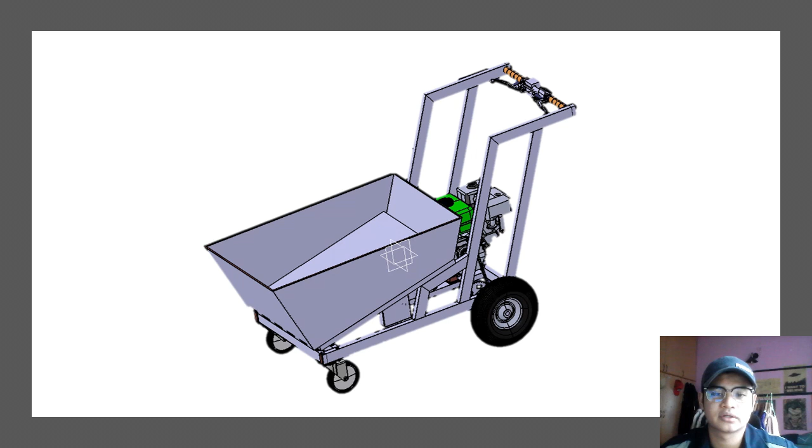As designers, they have to provide drawing and drafting of the product, suggest suitable design ideas, and guide members on Catia drawing, such as helping members if they need help drawing in Catia.

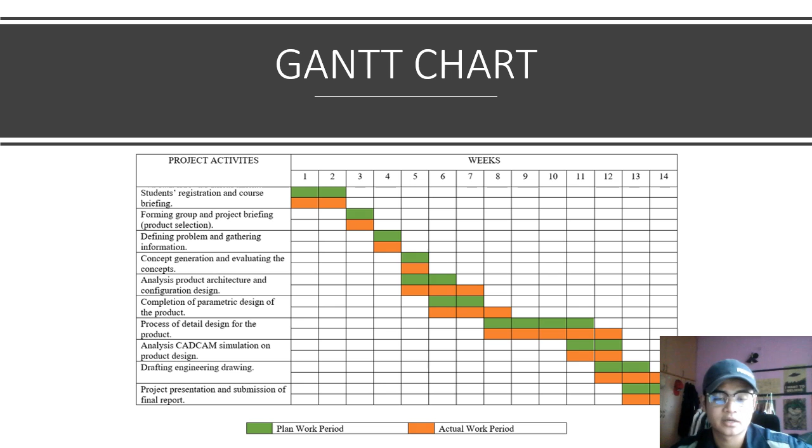Next, on customer needs, we sent out questionnaires to several agriculture workers and agriculture students, conducted through the Google Forms platform. Here are some of our questions on Google Forms, where we ask basic questions about how they use the wheelbarrow.

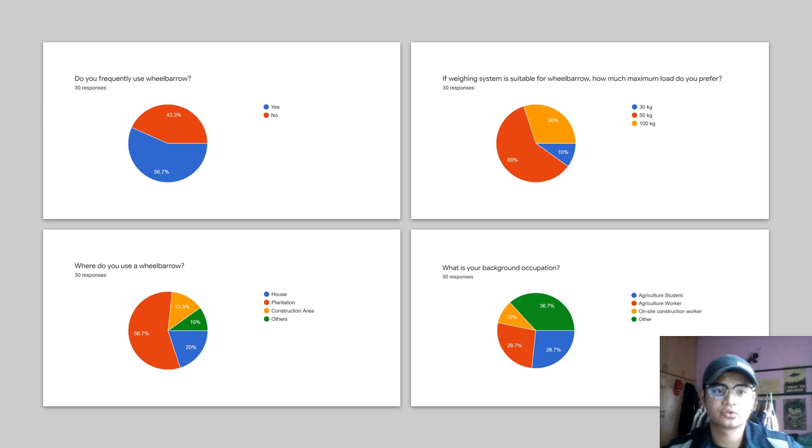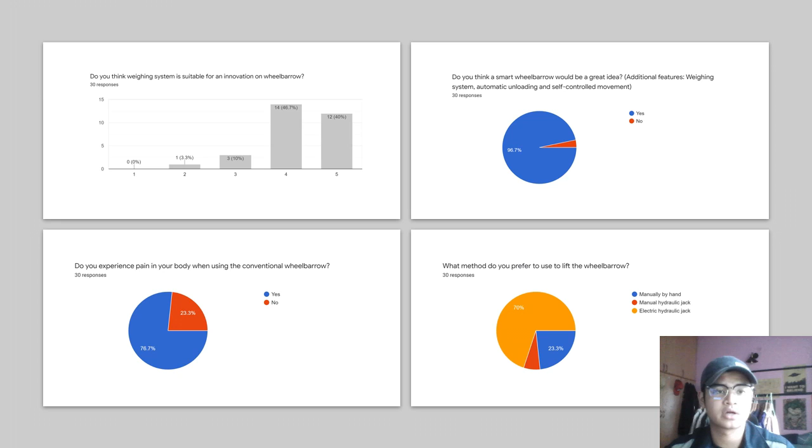From these questions, we used their feedback to come to a conclusion on what would be the best innovation we could use on our wheelbarrow product. Assalamualaikum.

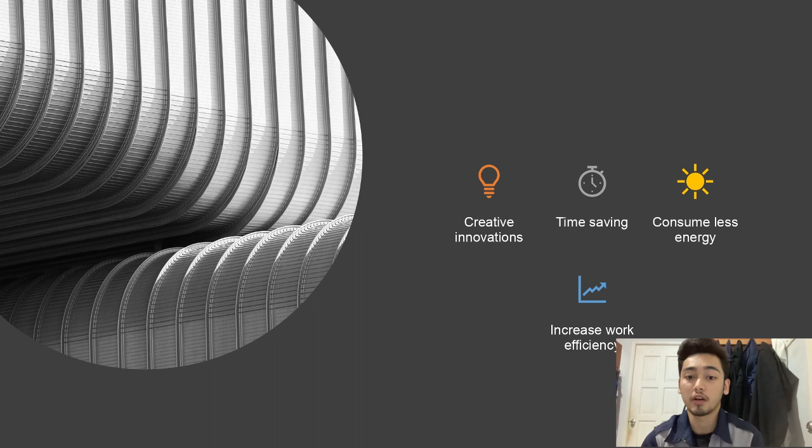For the first one, creative innovation, we installed an electric jack that makes it easier to unload the bucket storage, and we also installed a weighing system that shows the current load weight.

The second benefit is that our product is time saving because it is powered by an engine, which makes it move faster and easier to move around, along with the electric jack as mentioned before.

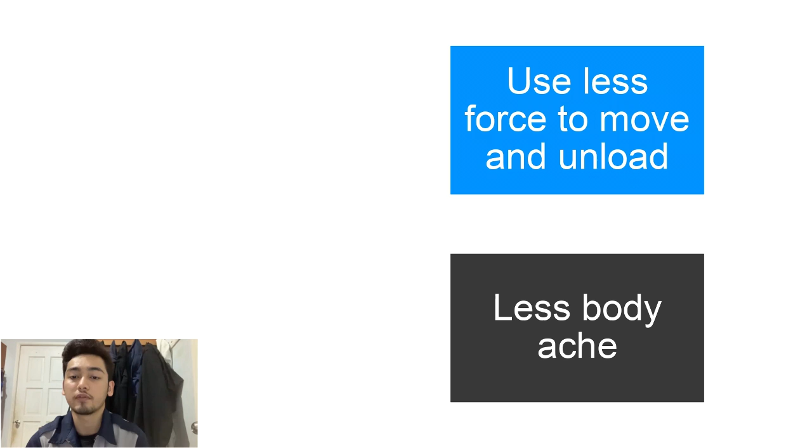The third one is it consumes less energy because with the help of the engine and electric jack, it will use less force to move around and unload, and it will also prevent body ache.

The last one is increased work efficiency. Our wheelbarrow can carry more load due to bigger bucket size, and more work could be done at once.

We continue with the problem statement. Number 1, standard wheelbarrow has an unstable design. Number 2, users are not able to use it as their preference. Number 3, a standard wheelbarrow can cause back injury. Number 4, standard wheelbarrow is hard to move around. And the last one, standard wheelbarrow is hard to unload.

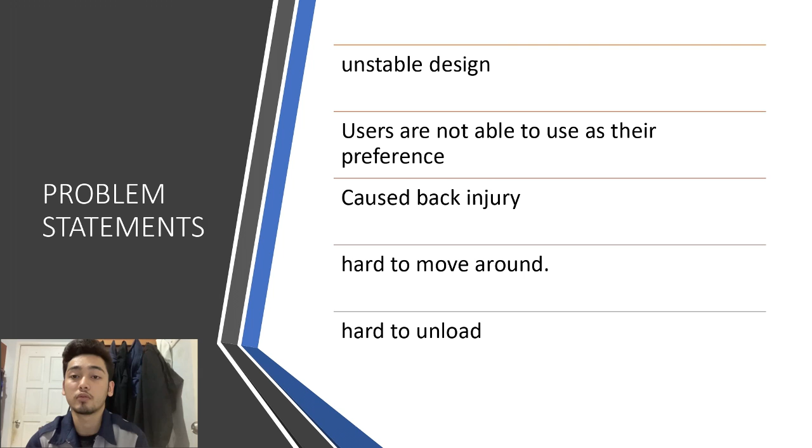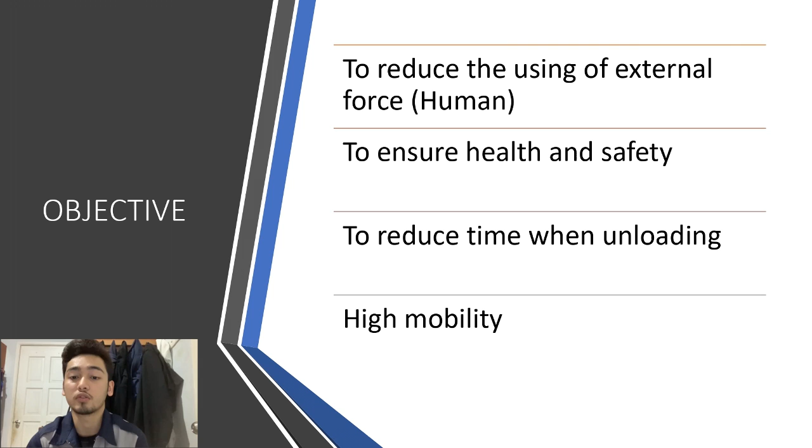Next, we move to the concept development. Referring to the Pugh chart for the battery, we will use the second one, PNS 12V 7.2Ah rechargeable lead acid battery, because it has the highest total score among these 3 options.

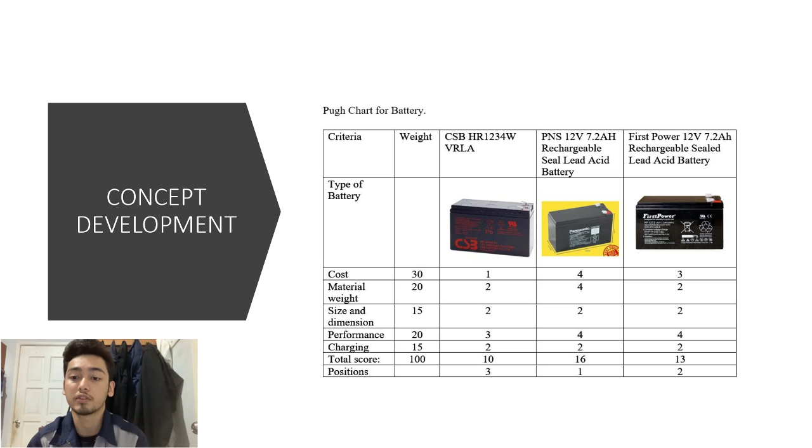Then we move to the Pugh chart for the electric jack, and we will use the third one, durable electric car jack, because it has the highest score among those 3 options.

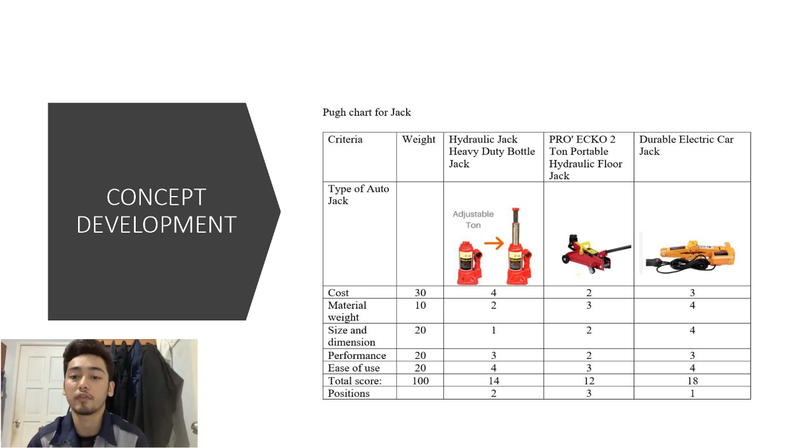Next is the circuit layout for the weighing system and the installation of the Arduino in the circuit. The circuit shown here is the whole circuit that will be represented in our product.

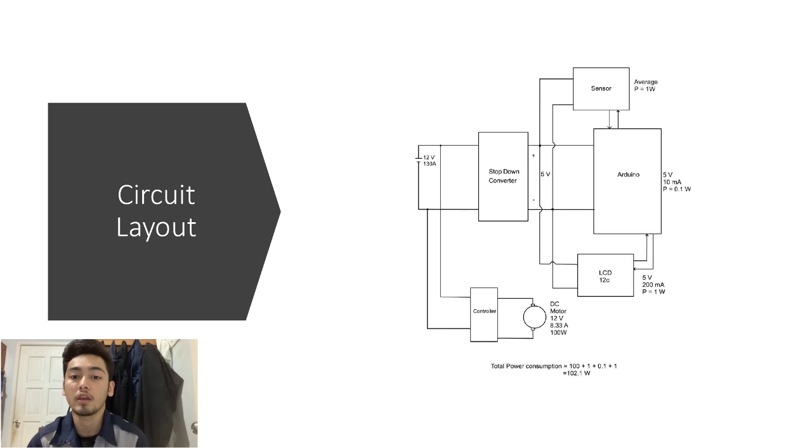And the last one is the working principle of the electric jack. First, turn on the switch for the electric jack to run the jack. Second, press and hold the up button to lift the bucket upward in order to unload the load. Third, press and hold the down button to make the bucket return to its original position. And the last one, turn off the switch button to power down the electric jack.

That's all from me. Thank you.

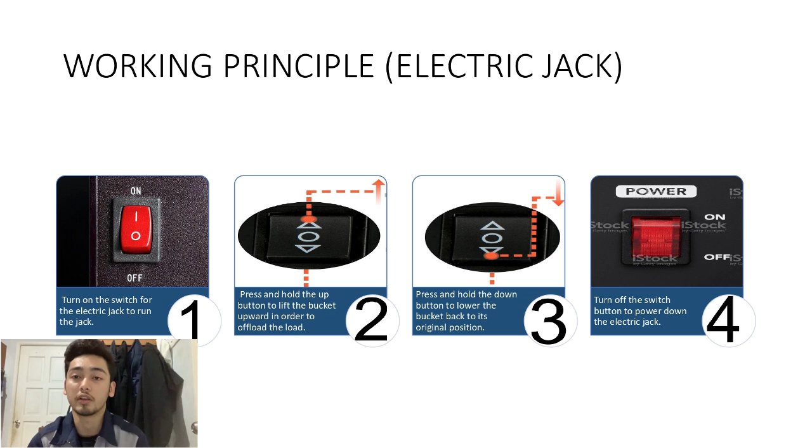This is our design for the wheelbarrow this year. First, the motorized jack, with 430mm of width and 137mm of height, and the weight is 4.5 kg.

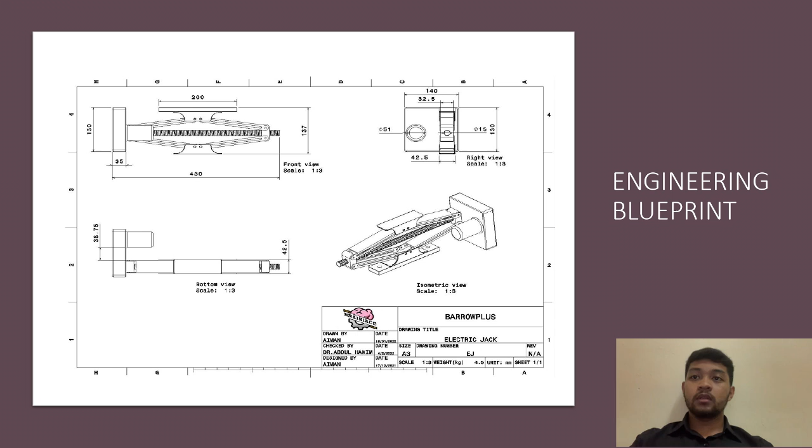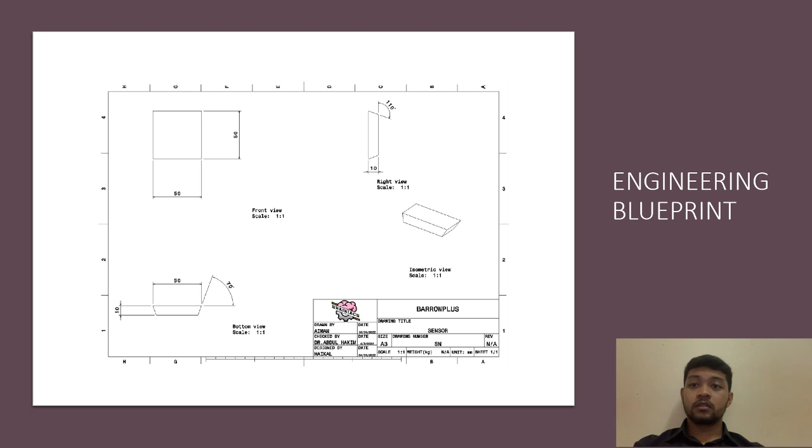Next, I will present the material used and joining method. For the motorized jack, the material used is described as heavy-duty steel. The American Iron and Steel Institute developed a classification system for the different types of iron and steel.

For the joining method, the four metal pieces are all connected at the corner with a bolt that allows the corner to swivel. The screw thread runs across these assemblies and through the corners. To reduce the weight of the jack by changing the manufacturability, we have to remove the welding to avoid distortion.

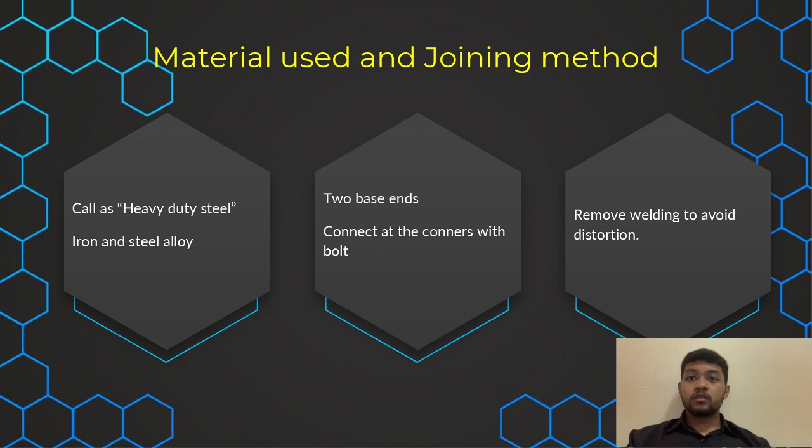Next is the drive system and the product performance. Under favorable conditions, the jack can lift the wheelbarrow when it comes in contact with the upper plate, caused by rotation of the power screw through electric power taken from the 12 volt battery. The switch button connected with the jack will be plugged into the port, thus connecting directly with the battery.

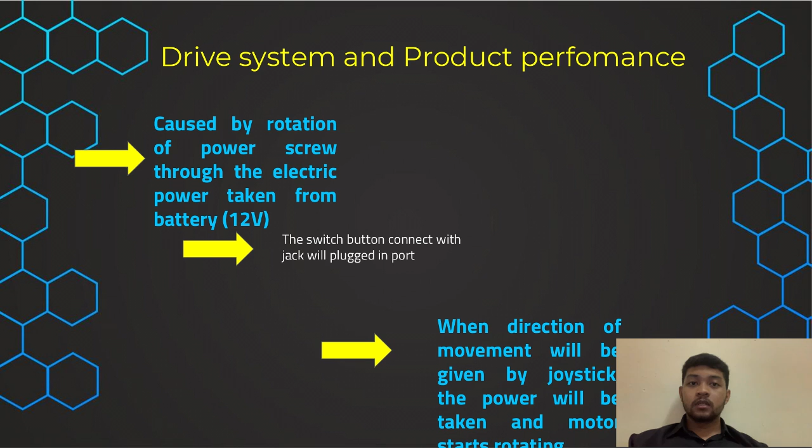When the direction of movement is given by the joystick, power will be taken and the motor starts rotating. The motor will transfer its rotating speed to the pinion gear, meshing with a bigger gear which is connected to the power screw, and it will rotate.

Next, for the safety features: it is stable and easily controllable by a switch. Second, it is capable of lifting a wheelbarrow load of 50 kg to 100 kg. And the last one, the battery case is used to protect it from bad weather.

And that's all from me. Thank you.

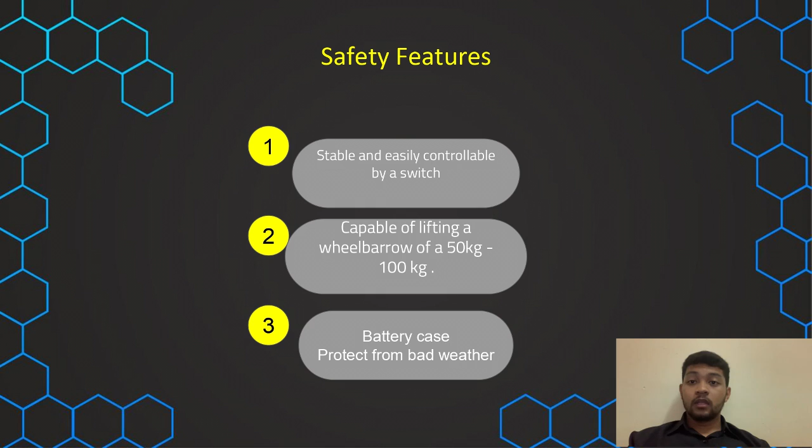In our engineering analysis, first we want to address how we use finite element analysis on the jack and the base of the system. We use 500 Newton in all of our analysis, and all the studies are static analysis. In this slide we're going to use two analyses: the first is von Mises stress, and the second is displacement of the product.

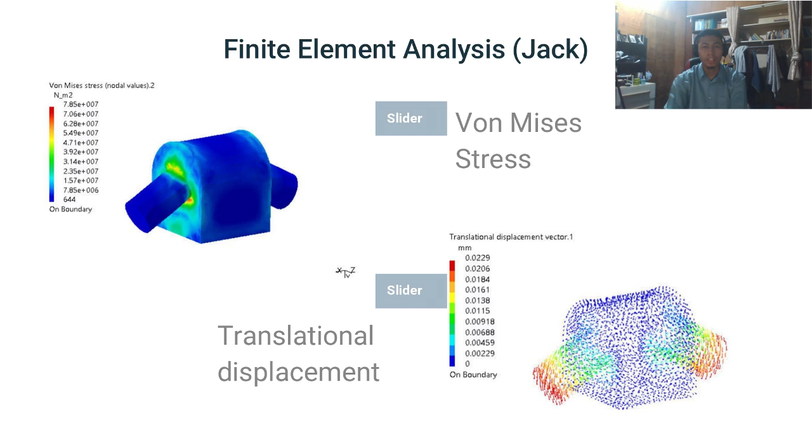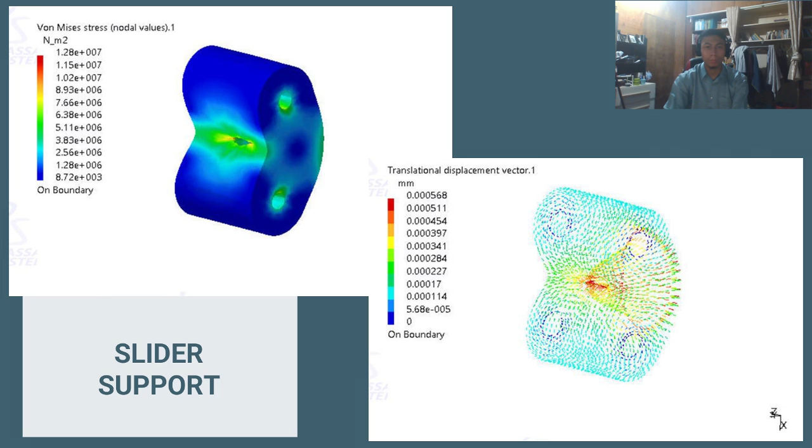For the first component of the jack, we use the slider. We clamp or fix the slider at the bottom, and for the distribution force, we apply it at the top of the curved surface and both cylinders on each side.

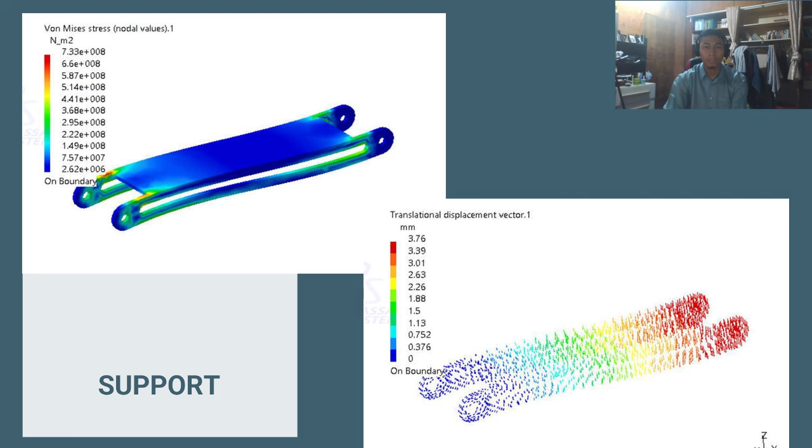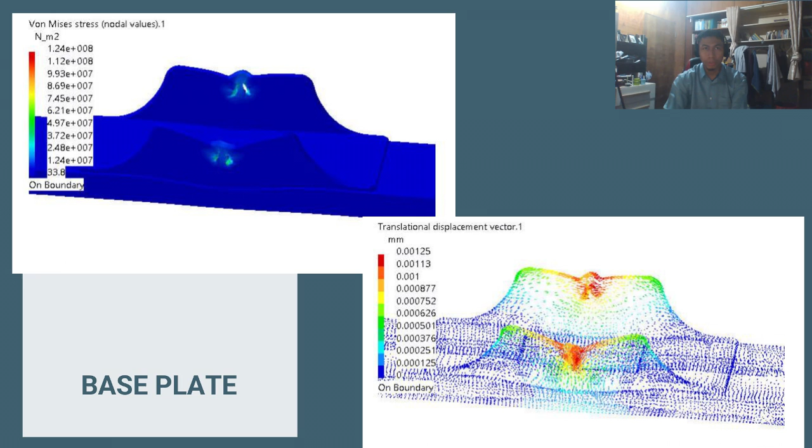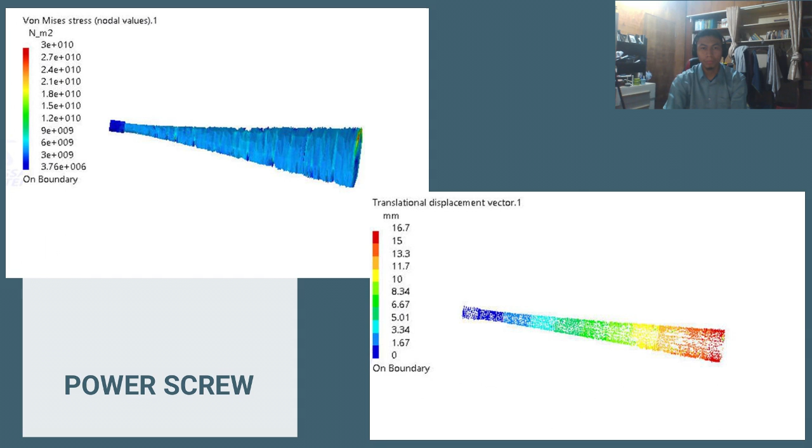From the diagram, we can see the max stress happens at 7.85 times 10 to the power of 7. The part will not fail, since the max stress of the steel is 8.9 times 10 to the power of 8. From the displacement diagram, you can see most of the displacement happens on the side of the cylinder.

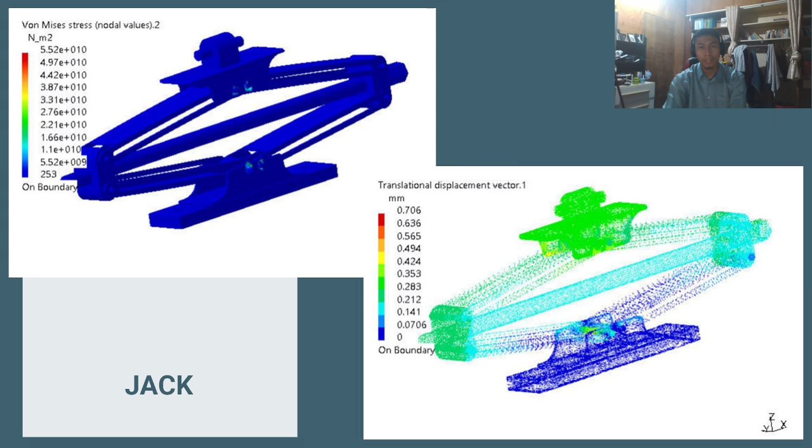For the combined product, most constraints use contact connection properties between all the touching parts. We clamp the product at the bottom, and the force acting on the part is the same as used in the slider. But from the stress diagram, you can see the stress acting on the product exceeds the steel yield strength, so we conclude that the product will fail.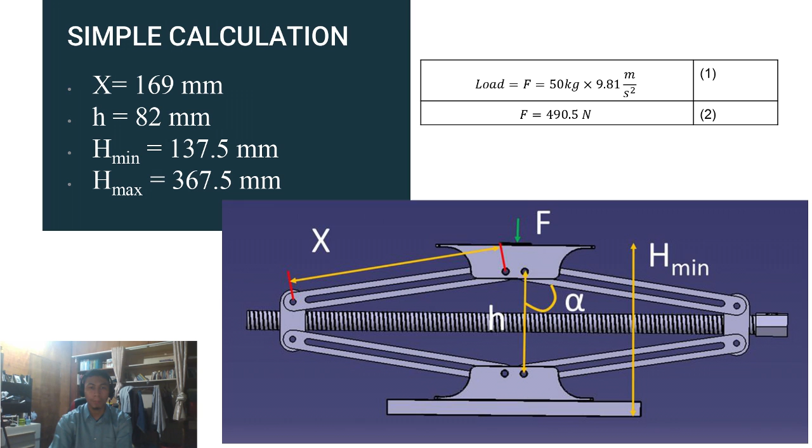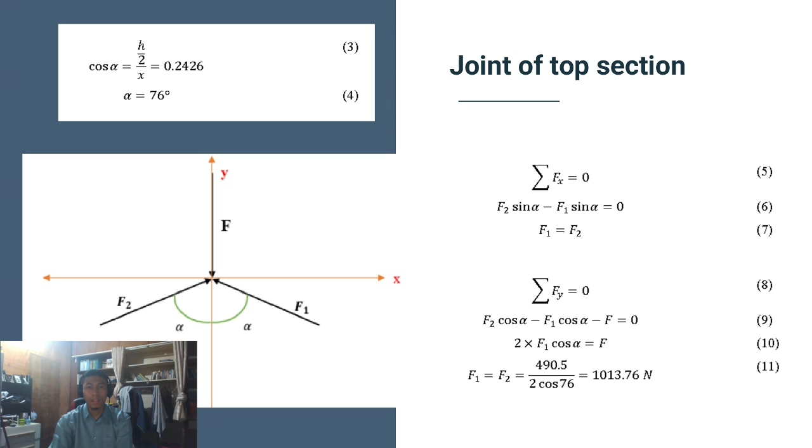For our simple calculation for the scissor jack, from the force analysis diagram, we assume the scissor car jack is loaded vertically symmetrical. In the next slide, we simplify the mechanism at the joint of the top section as shown in the diagram. The following calculation determines the forces at the joint of the power screw and arms using equilibrium of forces.

To finalize and justify our design, for example regarding our potential customer needs, the feature design should be able to assist customers in operating the wheelbarrow. This is shown by our initial research on customer needs when investigating the design solution for the problem. The questionnaire showed that more than half of our respondents frequently use the wheelbarrow.

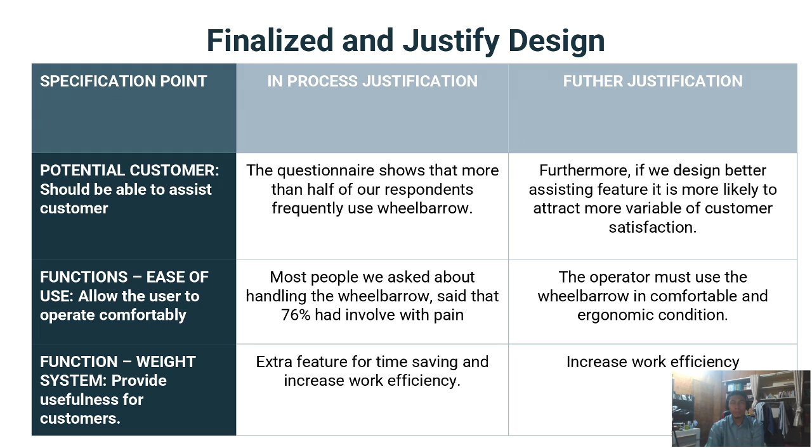Besides, if we design a better assistive feature in our product that appeals to a wide range of customers, it is more likely to attract a more variable range of customer satisfaction.

In our actual result, the jack we will use is able to lift a maximum of 2 tons, and our product only requires lifting 50 kilograms. So the FEA we conducted is only for experimental purposes or as a reference.

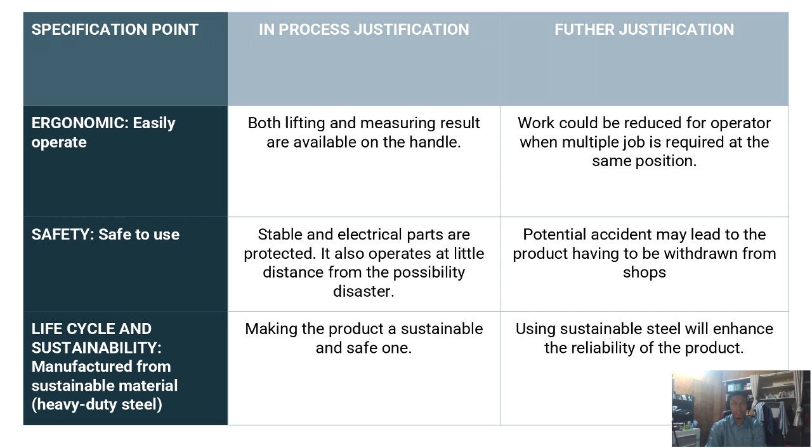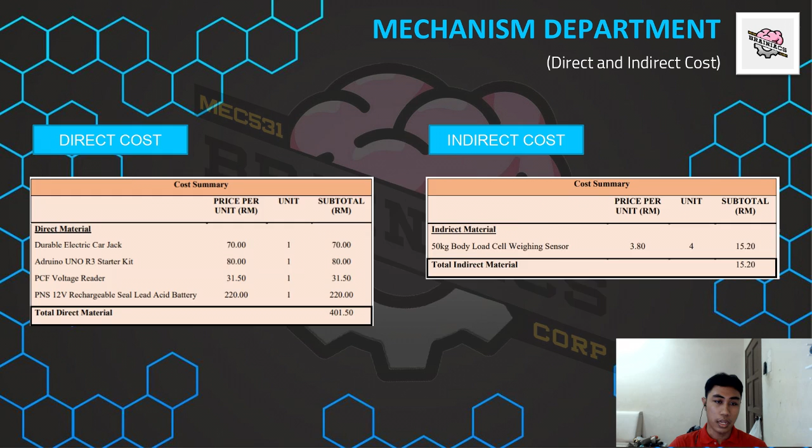As for the indirect cost, the total cost for indirect material is RM 15.20, consisting of a 50 kg body load cell weighing sensor. In relation to that, the total material cost sums up to around RM 416.70.

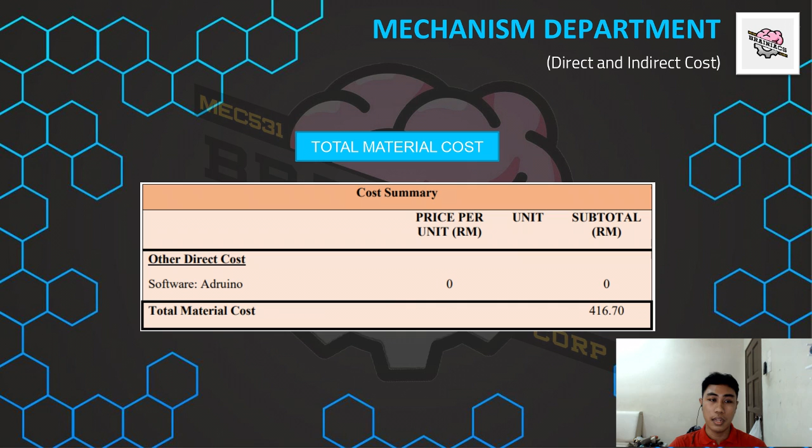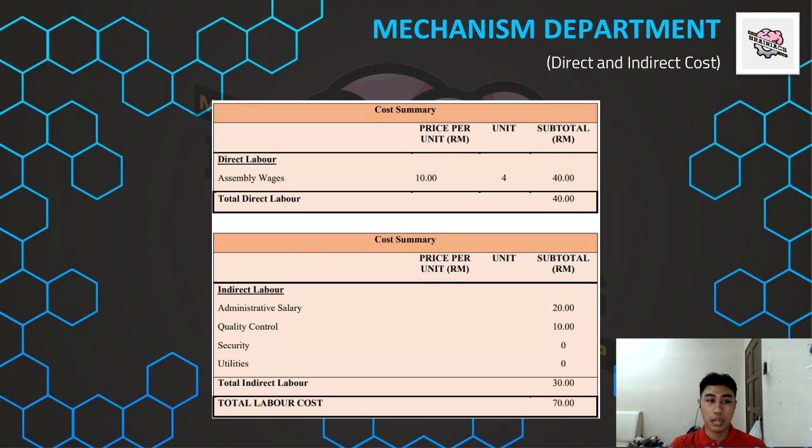The following slide presents total expenses for both direct and indirect labor. For direct labor, the total cost is RM 40. Meanwhile, the total cost for indirect labor is around RM 30. Following that is the total summarized cost for the mechanism department, which is RM 486.70.

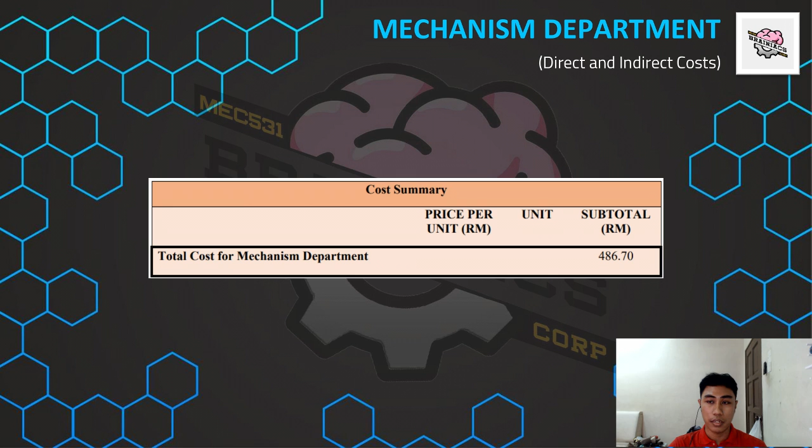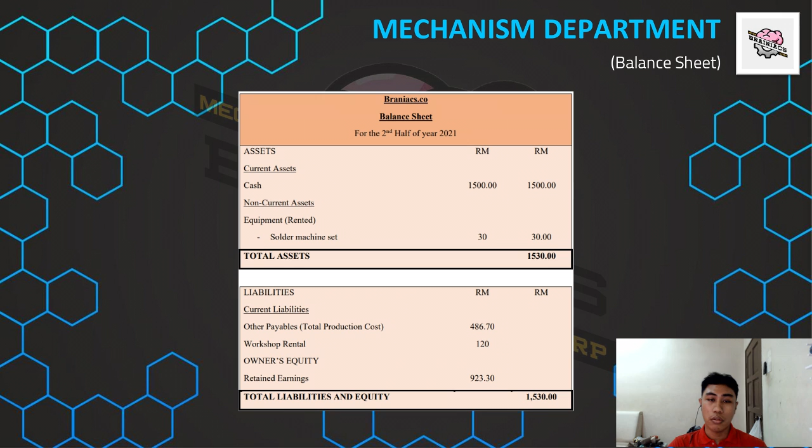Last but not least is the balance sheet, presenting the total assets for the second half of the year 2021, which cost RM 1530, and total liabilities and equity, which cost RM 1530.